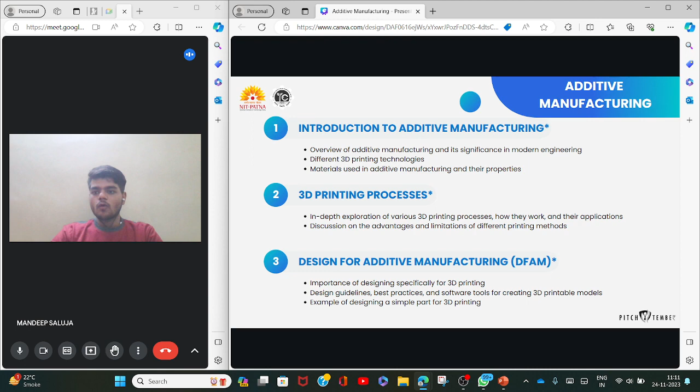So giving an overview about what is manufacturing. Manufacturing is the process of converting raw materials. If we study what raw material is, it is the starting material of any process in manufacturing, where machining, where the work starts to create any object, to create any shape.

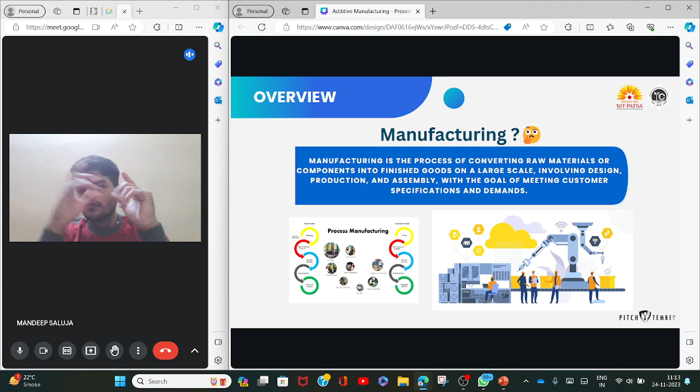It is going to involve design, production, and assembly. Three things. First, design of the product, the blueprint of the product which is going to be manufactured. Second is production, the actual machining process, where the product will be produced with the use of machines, tools, and other helpful components.

And why are we doing manufacturing, and why does it have so many processes in it? You can see here a chart, and there are so many processes starting from selection of material, then designing, then production, post processing, logistics, distribution, everything. So this all comes under manufacturing.

People get confused that manufacturing means making something, like work will happen on a machine. No, that is machining, that is part of production. Production is not manufacturing, but production is a part of the manufacturing process.

Okay, so what is our goal? Our goal will be meeting customer specifications and demand. What does the customer want? What has the customer demanded?

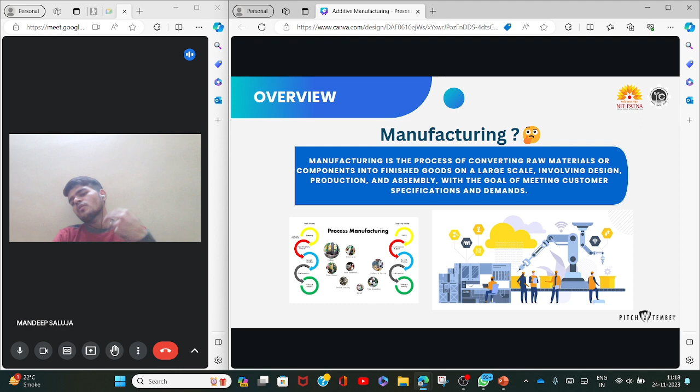Often with tools like lathes or milling machines. Okay, now machining means there are tool machines which are called machine tools like lathe machines, milling machines, on which different machining processes are done to get the required shape, to get the required object we want. How it is done, like for example, knurling is a process, turning is a process, facing is a process, drilling is a process. All these are different processes.

Like if we want to make a hole, we are going to use a drill. If we want to smoothen the surface of something, we are going to do facing or turning. If we want grooves, we are going to do turning. If you want grip, diamond shape grip, then we are going to do knurling, like that. Now, thirdly, there is forming,

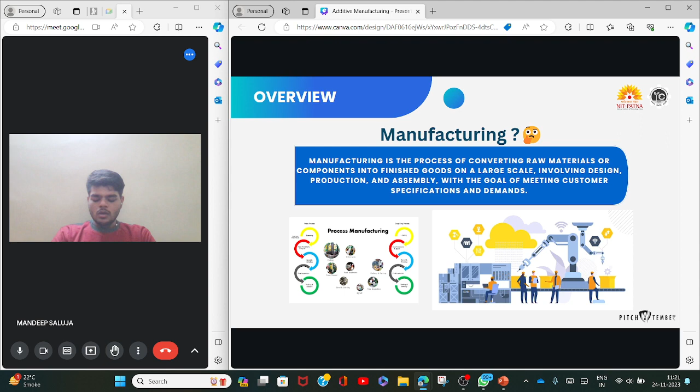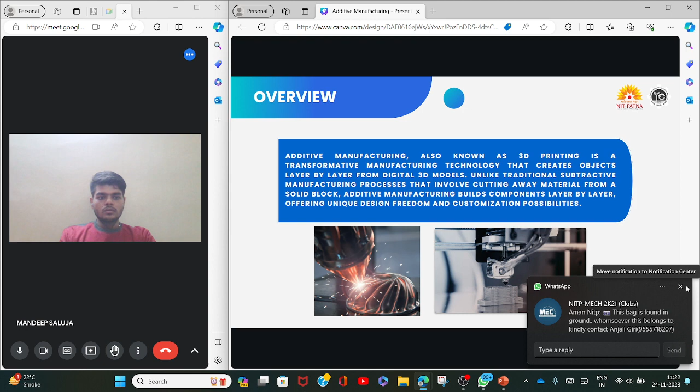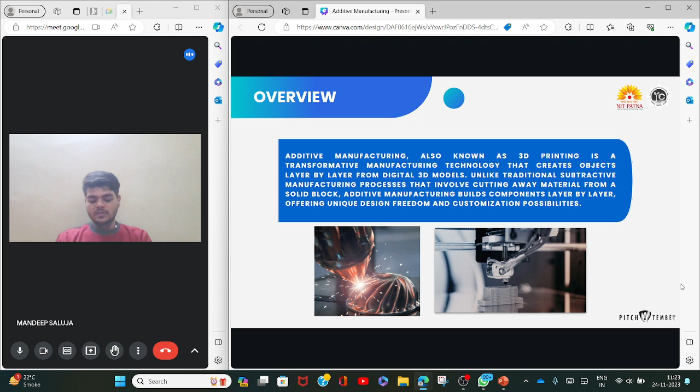Unlike traditional subtractive manufacturing processes that involve cutting away material from a solid block, as I discussed, additive manufacturing builds components layer by layer, offering unique design freedom and customization possibilities. Okay. Now, what are the important points? First, how does the additive manufacturing process start?

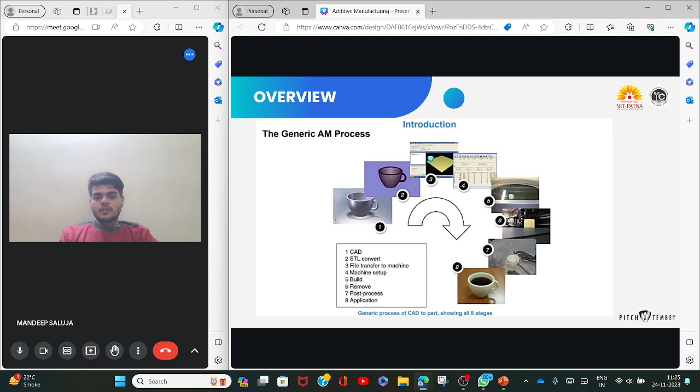Then, which material is being used. A material box is there, material is filled in it, and there are different materials like plastics. We are going to discuss metals, ceramics, and even biological materials. Okay. After building, the part is removed from the machine, and then post processing is done, post curing is done, or the surface is made more finished, and then the application happens.

So this was the basic principle of additive manufacturing. The most important thing is layering, layer by layer making. Layer bonding: the printer deposits or fuses the material layer upon layer following the sliced design. The whole design is sliced into smaller parts, each with its individual dimensions, and the data is fed to the printer slice by slice, and each slice is perceived by the machine and then executed.

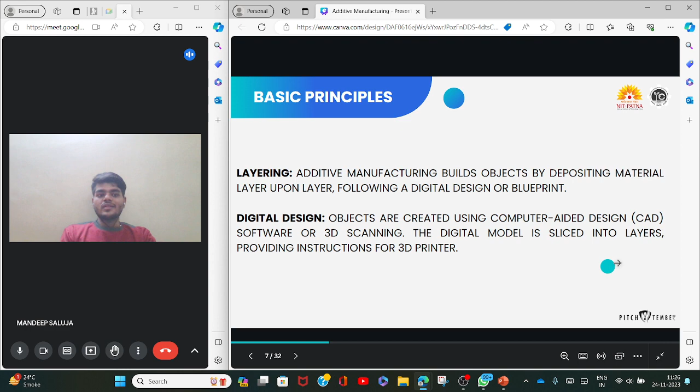Secondly, the digital design. The digital model is sliced into layers, providing instructions for the 3D printer. This point I've discussed.

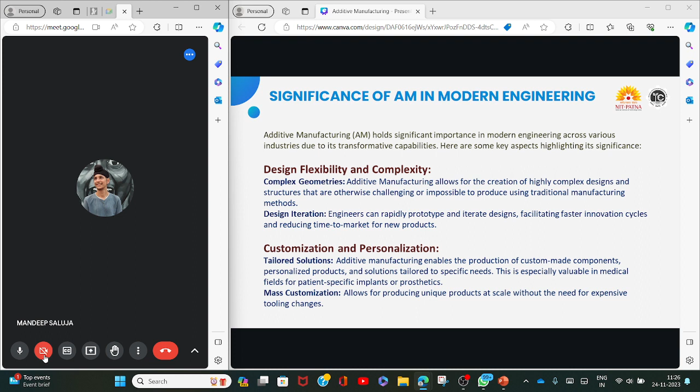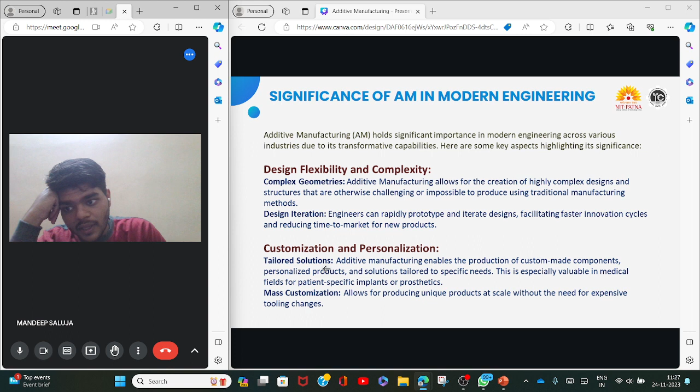What is the significance of additive manufacturing in modern engineering? These things are easy. There is design flexibility, and complexity we can achieve. Since we are adding material rather than subtracting it, we can achieve more complexity, and design flexibility can also be achieved. Secondly, iteration can be done: the design data can be documented and then used later on.

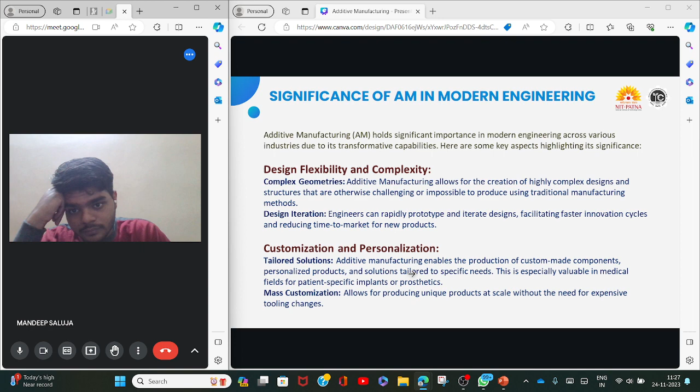Now, customization and personalization can be done. Material innovation: different materials can be used. Since there is no issue of tool strength, since the material is not being subtracted or removed, different materials can be used, diversifying the material domain. Additive manufacturing technology is evolving to work with various materials, including metals, polymers, ceramics, leading to innovative material combinations and properties. Lightweight materials can be used.

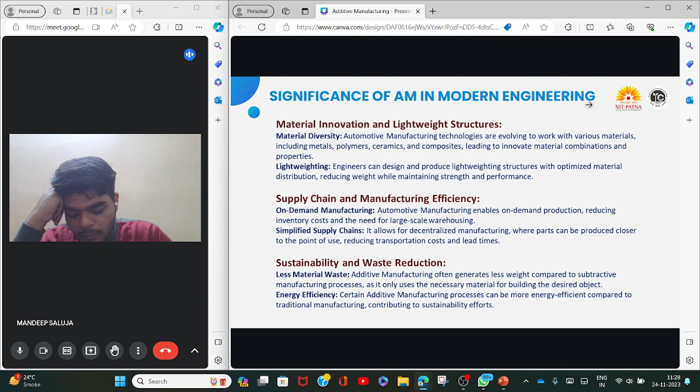Engineers can design and produce lightweight structures with optimized material distribution, reducing weight while maintaining strength and performance. Okay. Next is supply chain and manufacturing efficiencies, because the time taken for manufacturing is reduced.

Time taken for manufacturing is reduced. Therefore, since the number of processes in manufacturing are reduced, efficiency is increased.

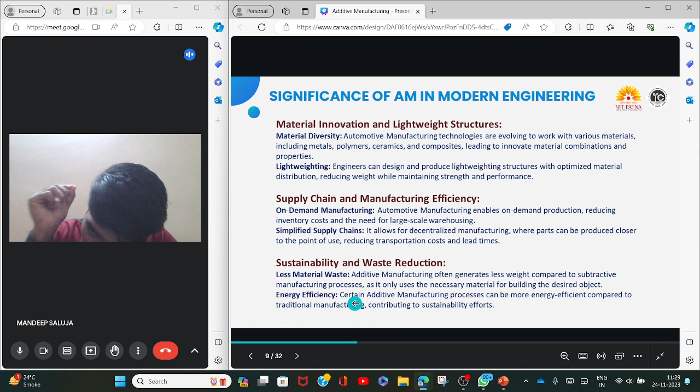Now, sustainability and waste reduction. This is the most important point: material wasted is less since material is not being removed, therefore there is less material wasted.

There is no use of external tools, therefore energy efficiency is increased and energy is saved. Because when tools work on any object, there is contact between both of them, and due to that contact, friction is generated, and the friction causes heat loss or dissipation of energy.

Also, in space rockets, the material used should be very light, so that the space rocket being sent into space is able to move outside, able to overcome the gravitational pull of our Earth.

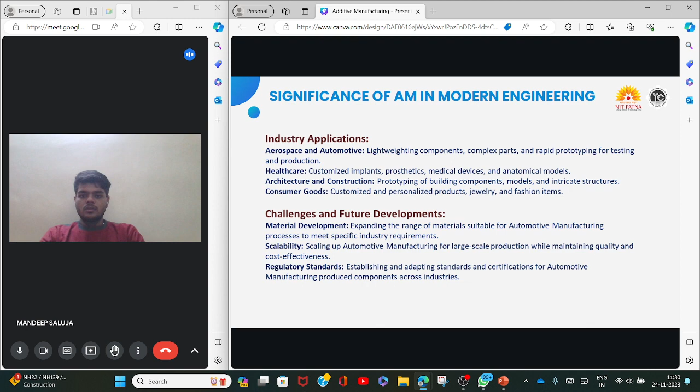Now I wanted to discuss different types of additive manufacturing processes. Looking into different types, there are three major additive manufacturing processes: selective laser sintering, fused deposition modeling or fused filament fabrication, and stereolithography. These are the three important processes.

Let's go through what fused deposition modeling is. The technique involves heating and extruding thermoplastic material through a nozzle layer by layer. Material is extruded from a nozzle and deposited on the platform.

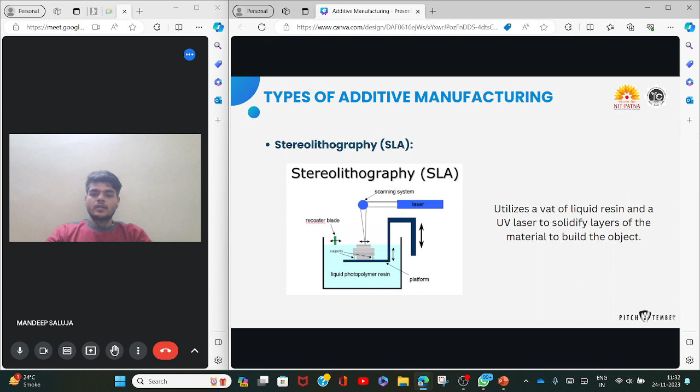Now, selective laser sintering, similarly, laser is used for the heating purpose, such that plastic or metal particles are fused together layer by layer.

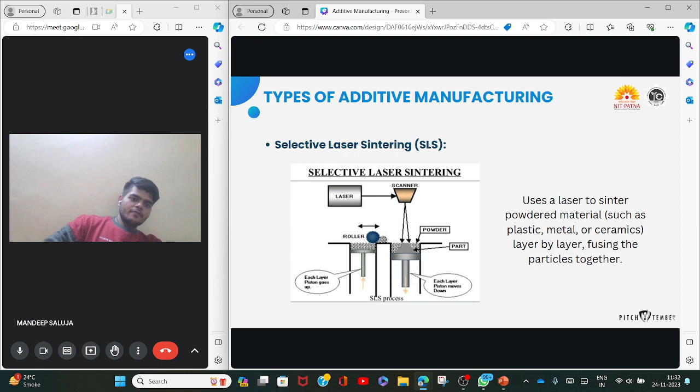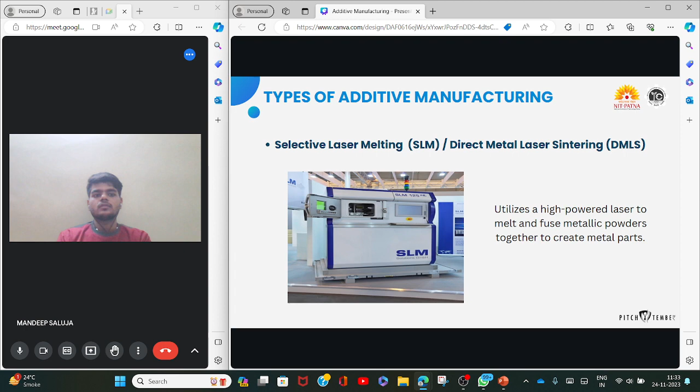Similarly, selective laser melting is done. Electron beam melting is a process in which the laser being used is specific, an electron beam, and these are the processes.

Now, what are the materials used in additive manufacturing? The materials used vary across different techniques, each offering specific properties suitable for diverse applications. Here's an overview.

Among polymers, materials like acrylonitrile butadiene styrene are used. Its properties are that it is tough, impact resistant, and versatile, commonly used in fused deposition modeling because it is tough and impact resistant.

Polylactic acid. Now this is important. Its properties are that it is biodegradable, easy to print, environment friendly, and it is used in FDM printers. See, it is interesting.

Polylactic acid - lactic acids are a group of acids found in our body, which are degradable. How are they degradable? Because they are found in our body and we are natural living beings, therefore it is biodegradable.

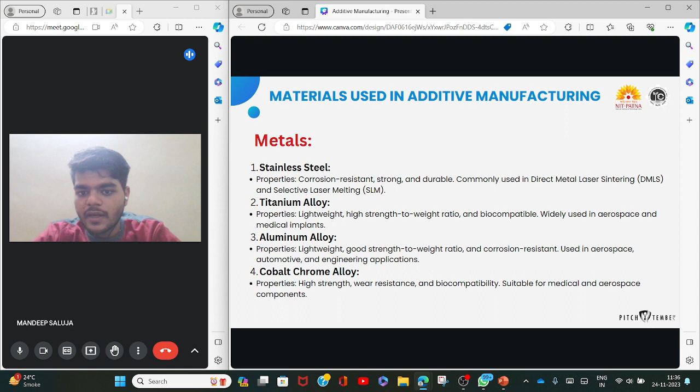Then titanium alloy - its properties are lightweight, high strength to weight ratio, biocompatible, and it is widely used in aerospace and medical implants. Aluminum alloy is lightweight, has good strength to weight ratio, corrosion resistant, and is used in aerospace, automotive and engineering applications.

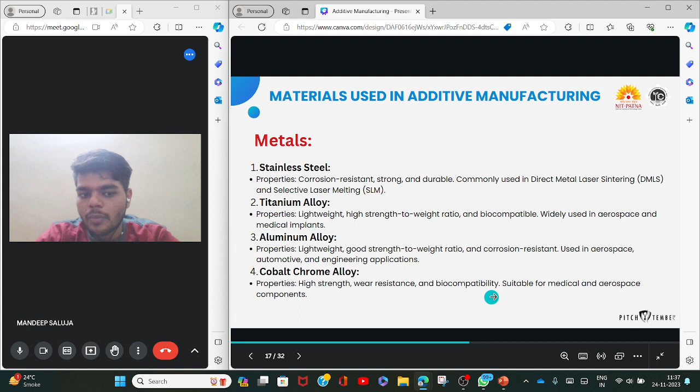Cobalt chrome alloy has high strength, wear resistance and biocompatibility, and it is suitable for medical and aerospace components. What are ceramics? Ceramics like aluminium oxide have high hardness, wear resistance, and electrical insulation, used for electronics, medical and mechanical applications.

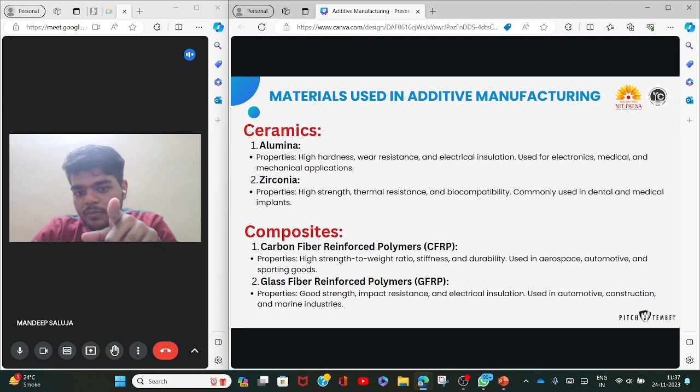What are composites? Composites are like carbon fiber reinforced polymers and glass fiber reinforced polymers. Other materials are like wax, which is used in investment casting, and sand, which is used in sand-based additive manufacturing, creating molds and cores in metal casting.

Properties are very important in material selection. For example, something frequently used in water should be chemical resistant. In nuclear reactors, the covering of the reactor should be able to absorb radioactive rays so that people working outside are not harmed. Therefore they are made of lead, since lead has the property of absorbing these rays. So material properties are very important for selection of material in different manufacturing processes.

One such process we are studying is additive manufacturing. So what are the different important properties kept in consideration while selecting materials? First is strength, which includes tensile strength, impact resistance, and fatigue resistance. Then durability, which is resistance to wear, corrosion, and chemical exposure. Temperature resistance is the ability to withstand high or low temperature. Flexibility or rigidity is the desired level of flexibility or stiffness for a specific application. And biocompatibility is crucial for medical and dental applications.

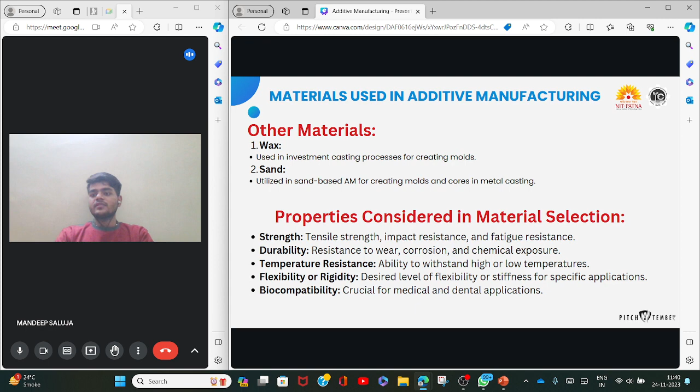Now I want to take you a little deep into different 3D printing processes and types. First is selective laser sintering, a powder bed fusion technique used in additive manufacturing, commonly known as 3D printing. It is a process that involves using a high powered laser to selectively fuse or sinter powdered material, typically polymers or metal powder, layer by layer to create a three-dimensional object. Selective laser sintering is known for its ability to produce complex geometries and functional prototypes with good mechanical properties.

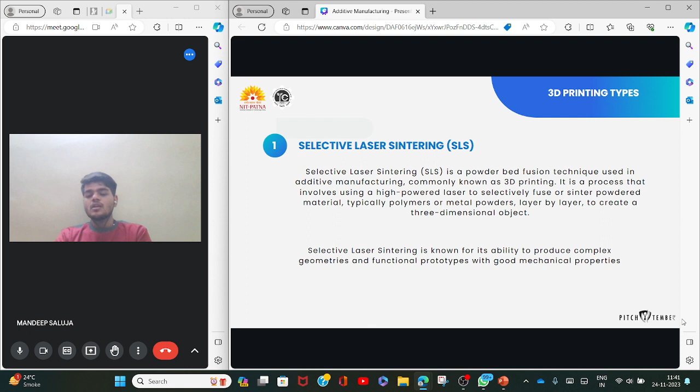So what is the most important point here? Layer by layer deposition of material is done through laser sintering. Secondly, selective laser sintering has the ability to produce complex geometries and functional prototypes which can perform some function, and which also have good mechanical properties.

Now I want to discuss the process of how it is done. First, a powder bed is prepared in which a thin layer of powder material, usually a polymer or metal powder, is spread. We studied different polymers like lactic acid polymer, polyamide polymers, and ether ketone polymers, and metal powders like stainless steel, which are spread evenly across a build platform. A platform is being built here, as discussed.

Secondly, laser sintering: a high powered laser selectively sinters or fuses the powdered material based on cross-section data derived from a 3D digital model. The laser heats the powder to just below its melting point. Here there is a scanning mirror, and the laser sent is high powered, due to which heat is generated and the material is heated just below its melting point, making it semi-liquid. Thus fusion takes place, and then it solidifies to take the shape fed inside, building layer by layer.

Support structures are required because most of the parts are hanging. So just to support them, support structures are needed. Then lastly, cooling is done: once a layer is sintered, it cools and solidifies before the next layer.

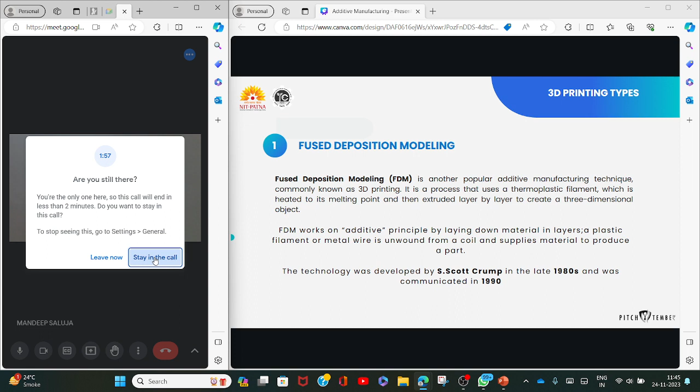What is fused deposition modeling? So fused deposition modeling is a popular additive manufacturing technique which is commonly known as 3D printing.

It is a process that uses a thermoplastic filament which is heated to its melting point and then extruded layer by layer to create a three-dimensional object. What is important here is that a thermoplastic filament is used, heated to its melting point, and then extruded layer by layer to create a three-dimensional object. Again, layer by layer extrusion and deposition of material is done, with heating done first.

I am addressing this so you can remember what is common in all the additive manufacturing processes and what the crucial steps are. First, a thermoplastic filament is used. Secondly, layer by layer deposition and extrusion is done - heating is done first, then layer by layer extrusion is done to create a three-dimensional object. The principle is simply laying down material in layers.

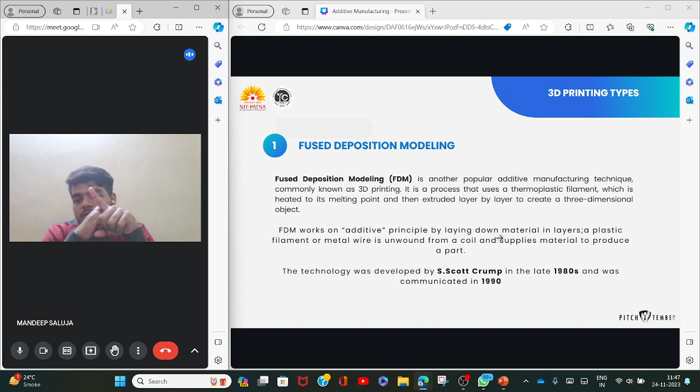A plastic filament or metal wire is unwound from a coil. The coil runs and material comes out from it, like flying a kite where the spool unwinds thread. Similarly here, there is a coil inside which metal wire or plastic filament is bound, and it is unbound from the coil, with material supplied to produce a part. Who developed this technology? It was S. Scott Crump in the late 1980s, but this technology was commercialized in 1990.

Now I wanted to discuss the various fused deposition modeling process steps.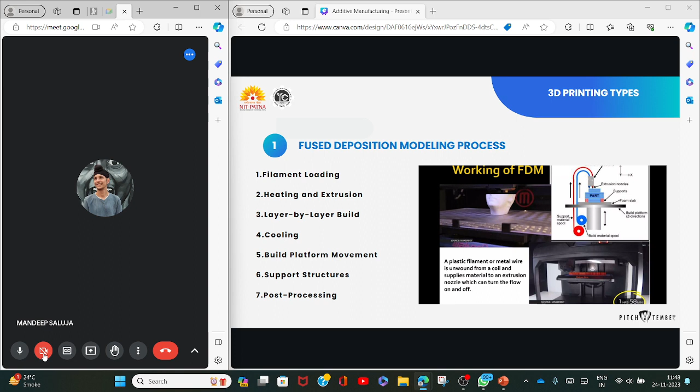First, filament loading is done. The process begins with a thermoplastic filament, usually in spool form, which is fed into the 3D printer. Then heating and extrusion is done - the filament passes through a heated nozzle where it melts into a semi-liquid state. The nozzle is moved by a robotic arm or a system of motors, and the melted material is extruded onto the build platform or the previous layer. Then layer by layer building is done. Similarly, support structure and cooling - everything is the same. I just wanted to give you an overview, keeping the session light.

What are its advantages? Material variety - FDM supports a wide range of thermoplastic materials, like polylactic acid, acrylonitrile butadiene styrene, and PETG which is polyethylene terephthalate glycol, and many more. Low cost is important - FDM printers are often more affordable compared to other 3D printing technologies.

Ease of use - printers are relatively easy to set up. Versatility is always there due to variety of materials. Applications include prototyping, customization, used in educational settings, and used in toolings. So therefore I can say fused deposition modeling may not achieve the same level of detail as other methods, but it is versatile, more accessible, and a popular choice for a range of applications.

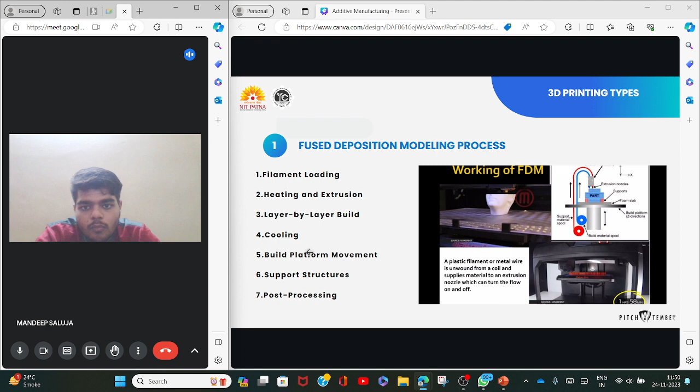Now moving on to the next process, that is stereolithography. I discussed about this photopolymerization reaction - it is one of the oldest and widely used additive manufacturing processes.

In the manufacturing process, it is a 3D printing technology that belongs to the category of vat photopolymerization. In SLA, a liquid photopolymer resin is selectively cured layer by layer using a laser or other light source to create a solid object.

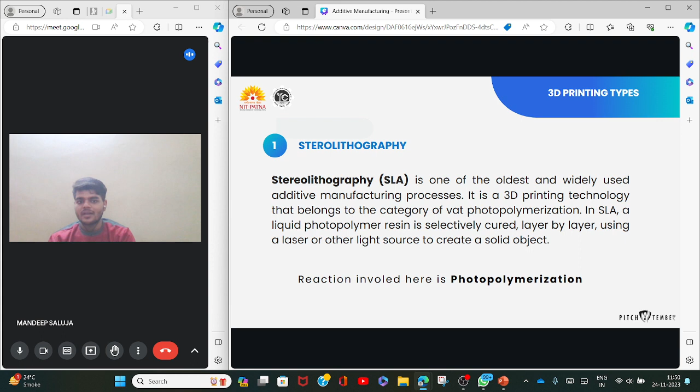Here, first a liquid resin vat is created. A vat of liquid photopolymer resin is used as the material for the 3D printing process. Secondly, layer by layer solidification is done. Layer by layer solidification means the 3D printer, stereolithography, begins by exposing the liquid resin which has been spread in the vat

to UV rays. UV rays से इसको expose किया जाता है.

The laser scans the cross section. This is what I was discussing, 3D scanning. Laser scanning is done onto the cross section, onto the surface of the liquid resin, solidifying it layer by layer. The solidified layer adheres to the previous one.

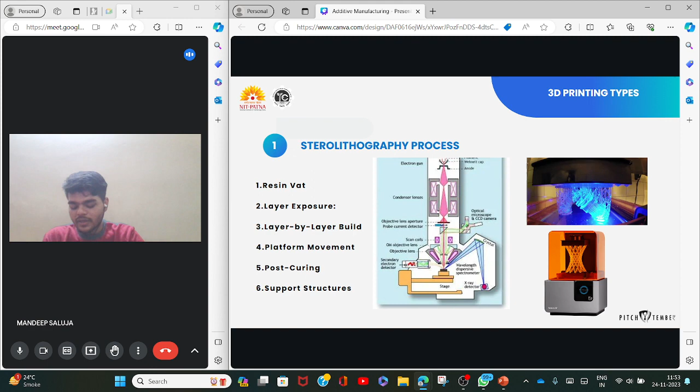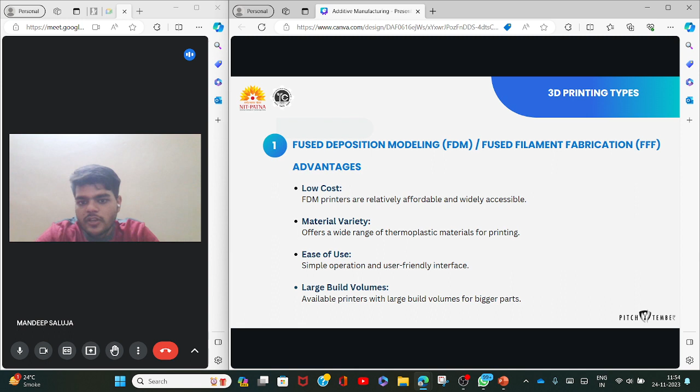I just covered all these parts in a speedy manner because I wanted to give you a basic overview of the theoretical aspects of this process. Now, I just wanted to discuss some important points. We have done with the fused deposition modeling advantages: low cost, material variety, ease of use, large build volumes for

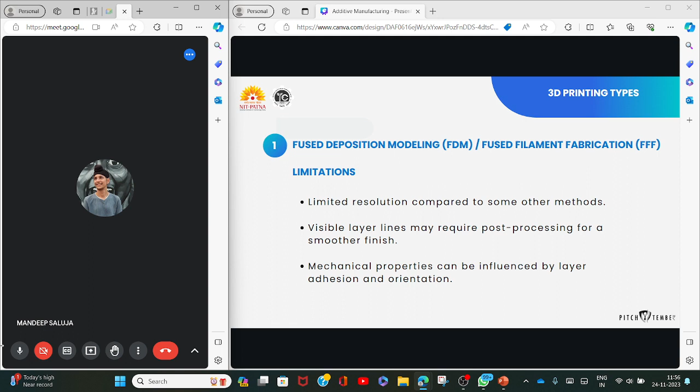Wait a minute, guys. Sorry, guys. Just a minute.

Lastly, I wanted to discuss some real world applications of additive manufacturing, and I want to give you an overview of the business perspective related to this technology.

So first of all, what are its applications? Most of the applications we have discussed, like customized medical implants. Additive manufacturing allows for the creation of customized medical implants tailored to individual patients, improving patient outcomes and reducing recovery time. Since every body is different, organ shape and organ size are different, there is a requirement for a variety of shapes and designs. So it allows customized medical implants.

Secondly, aerospace innovation. The aerospace industry utilizes 3D printing for lightweight and complex components. This has led to increased fuel efficiency, reduced cost, and faster prototyping in aircraft and spacecraft production.

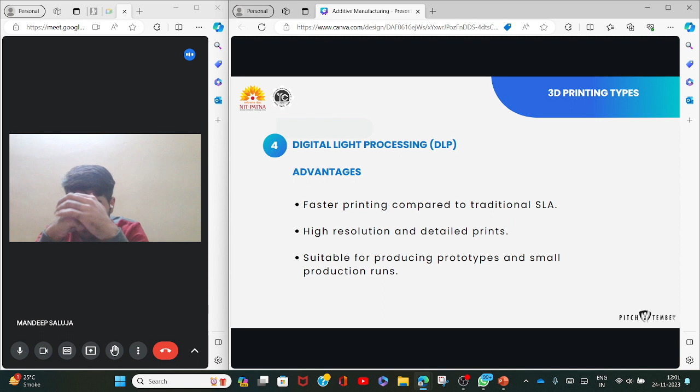Fourthly, reduced inventory cost. With on-demand production, businesses can minimize the need for large inventory. Inventory means where the material is being stored, where the made object is being stored. This shift from mass production to on-demand manufacturing helps in cost reduction and avoids excess stock. Complex geometry and lightweighting: industries like aerospace and automotive can benefit from the ability to produce complex and lightweight structures.

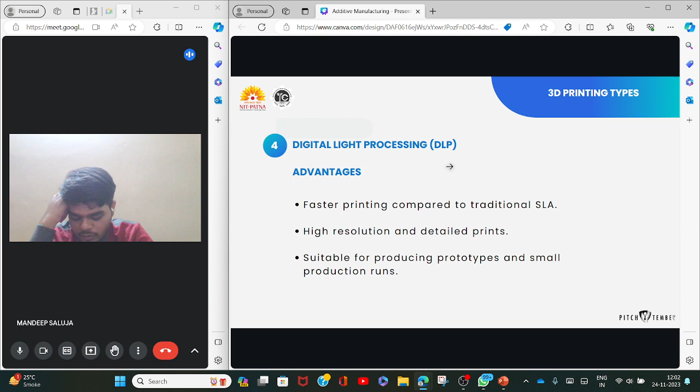Sixthly, tooling and manufacturing aids. Businesses can leverage 3D printing for producing customized tooling, jigs, and fixtures, leading to improved efficiency in manufacturing processes. Localized production and distributed manufacturing, cost-effective small batch production, innovation in spare parts, improved design iteration, new business models, and sustainability in waste reduction. There are many points which can be discussed, but I am discussing some of them. You can go through and research them on the internet.

So as businesses embrace additive manufacturing, they tend to gain in terms of agility, customization, and cost. See, cost efficiency is a very important thing. Profit generation should be maximum if we want to excel in business. Therefore, since manufacturing time is reduced, inventory cost is reduced, there is customization, there is more variety of materials available, more flexibility is available, more complexity can be achieved. All these factors cater towards generating maximum profit from a business which inculcates additive manufacturing processes.

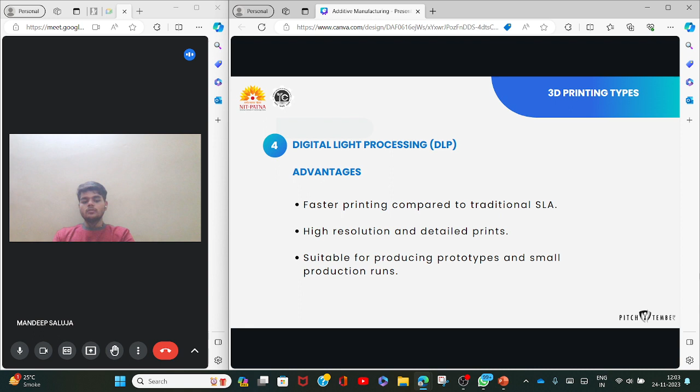Okay, so this ability actually helps us to rethink how this technology, which is revolutionizing our industries and the day-to-day lifestyle of a person, makes us more resilient and adaptive in our business ecosystem as compared to traditional manufacturing processes. So this was all for today, concluding my speech.

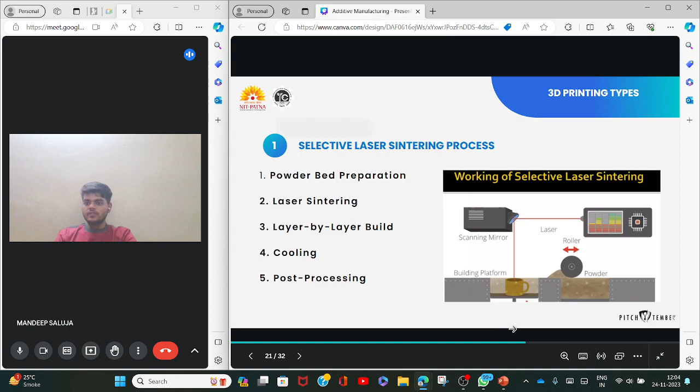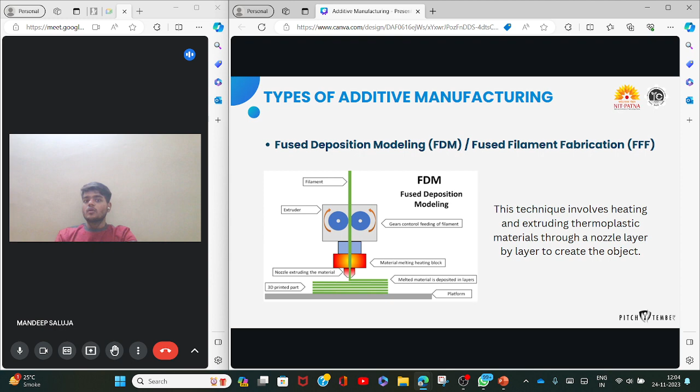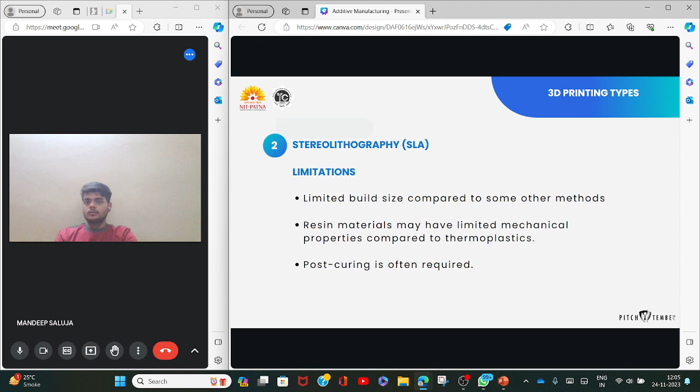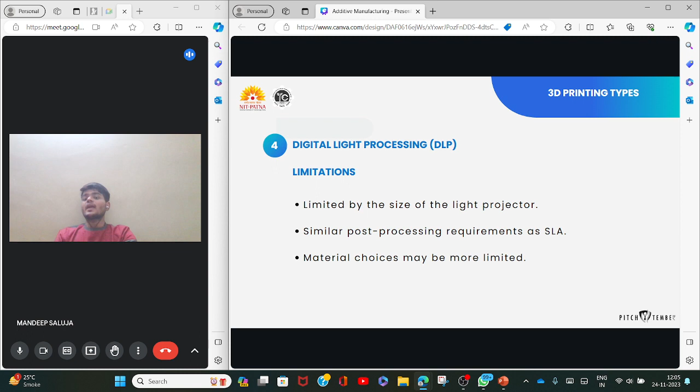So concluding our speech, let me go through everything. We studied the basics of additive manufacturing. We studied what manufacturing is firstly, then the basics, its applications, its basic principles, then the different types of additive manufacturing, which are 3D printing types. Okay, then after that, the different materials which are used in additive manufacturing, and then lastly we discussed the real world applications and the use of additive manufacturing compared to traditional, how it is more resilient and adaptive in our ecosystem as compared to traditional manufacturing processes.